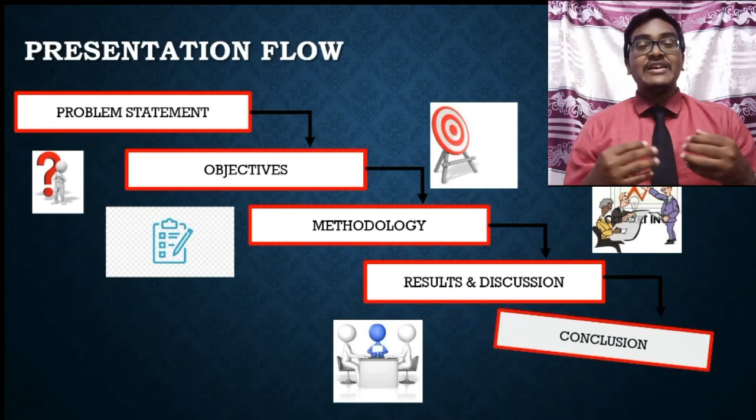Okay, the problem statement for my project. First, without adequate knowledge. People use these composite materials easily without adequate knowledge of disposal procedure. Second, end up throwing. After the end of life of the composite material, usually people may end up throwing it to the rivers, planted or sending waste to the landfill.

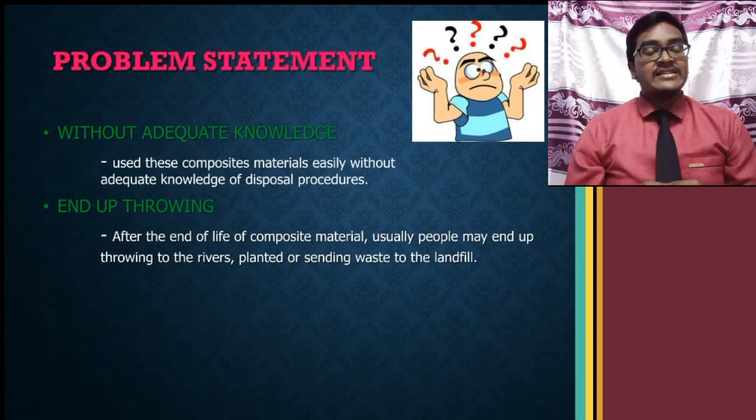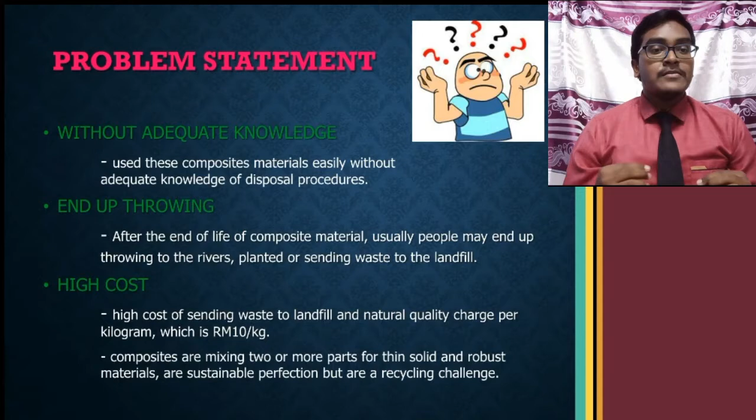Lastly, high cost. High cost of sending waste to landfill and natural quality charge per kilogram, which is 10 ringgit per kg. Composites are mixing two or more parts of thin solid and robust material, are sustainable perfection but a recycling challenge.

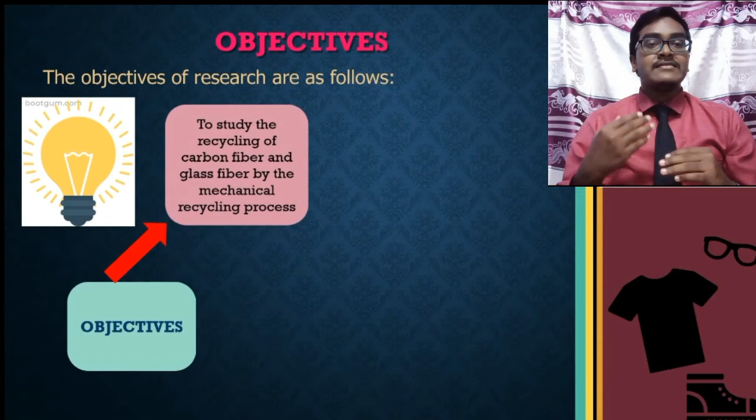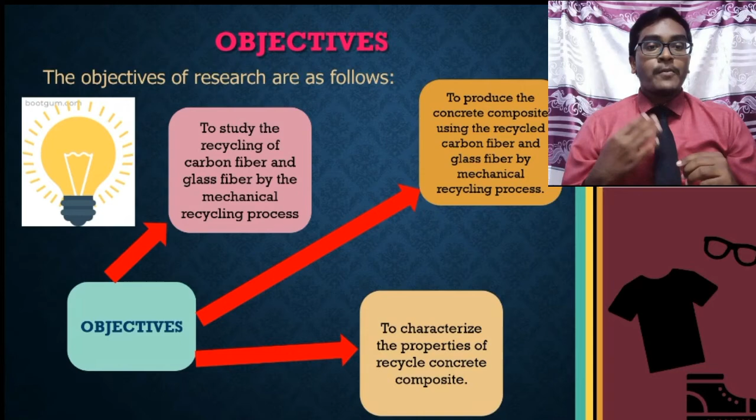Okay, now we move to objectives. There are three objectives for my research. First, to study the recycling of carbon fiber and glass fiber by the mechanical recycling process. Second, to produce the concrete composite using the recycled carbon fiber and glass fiber by mechanical recycling process. Lastly, to characterize the properties of recycled concrete composite.

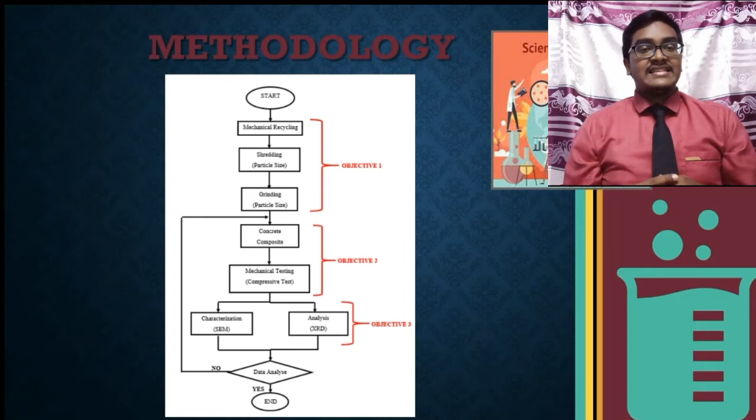Okay, here is my methodology. First, start, then mechanical recycling, then shredding, grinding, concrete composite, mechanical testing, which is compressive testing, then analysis of the recycled carbon fiber and glass fiber on concrete composite with SEM, which is scanning electron microscope, and XRD, X-ray diffraction, then lastly data analysis.

Okay, now I'm going to explain mechanical recycling. As you can see, there is the recycled glass fiber and recycled carbon fiber. So cut the recycled glass fiber and carbon fiber into small pieces. So the first step is shredding. Shredding the recycled glass fiber and recycled carbon fiber composite material into 50 to 100 mm small pieces using a shredding machine. Okay, next is the grinding process. Using the grinding machine, break down the material into 10 mm to 50 micrometer pieces.

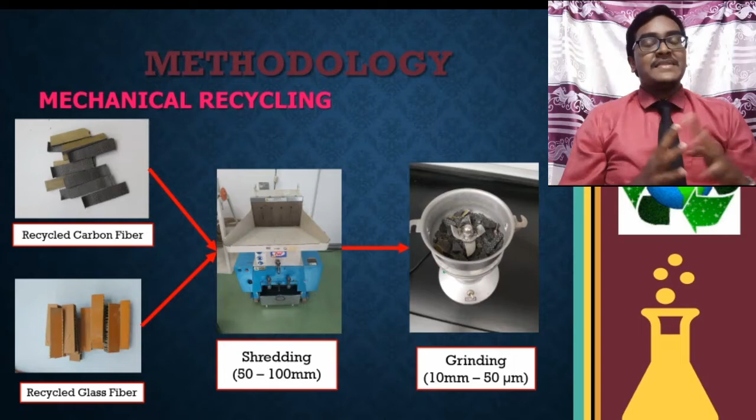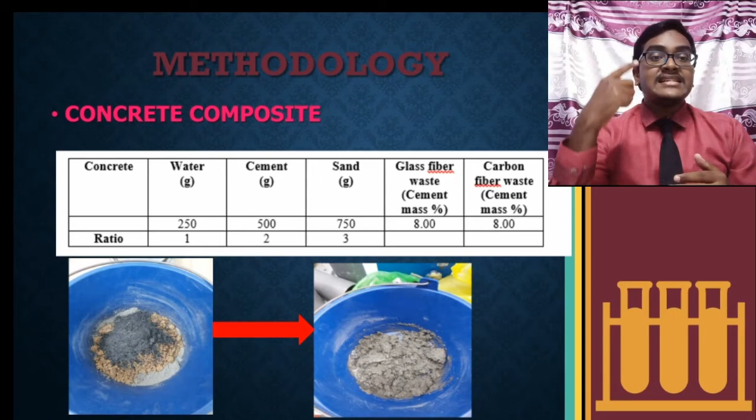Then pour the normal concrete into a cylinder-shaped mold measuring 100 mm in diameter and 150 mm in height to keep the concrete in place until it has set, and push it so that it fills the space. Pour the concrete with recycled glass fiber into a cylinder-shaped mold measuring 100 mm in diameter and 150 mm in height to keep the concrete in place until it has set, and push it so that it fills the space. Lastly, repeat the same steps for concrete with recycled carbon fiber.

Okay, before moving to the mechanical testing, the concrete must be cured. As soon as the concrete is hardened, curing should begin and last for at least 7 days. Okay, now mechanical testing for concrete composite. There was one mechanical test carried out in this research, which was compressive testing. The experiments undertaken in this analysis adhere to ASTM C39. As you can see, the figure shows the compressive testing machine with maximum load at 100 kN. Determine the fracture type and then enter the load and fracture type.

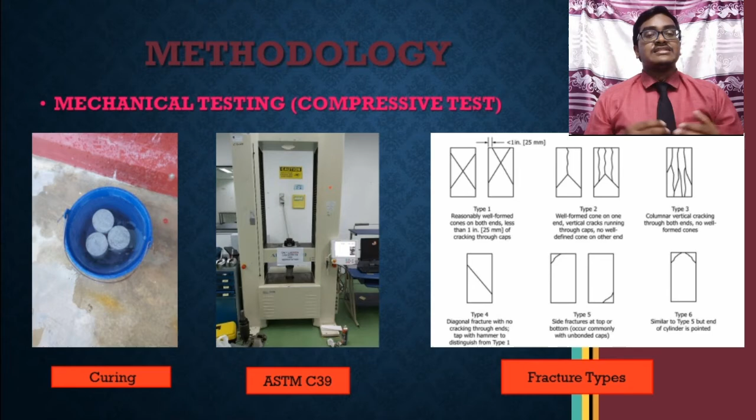Okay, now I'm going to explain results and discussion. First of all, visual observation. As shown in the figure, the recycled glass fiber and recycled carbon fiber are in microscale size after the grinding process. Besides, after the grinding process, the microscale recycled glass fiber and recycled carbon fiber are mixed together with water, cement and sand to make the concrete.

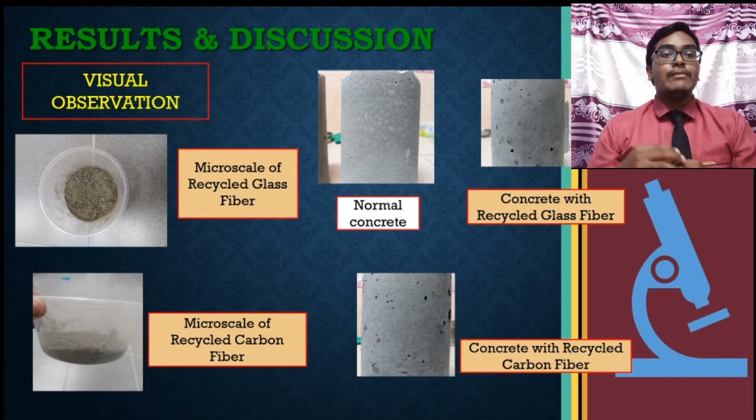Okay, as you can see in the figures, the normal concrete, concrete with recycled glass fiber and concrete with recycled carbon fiber successfully formed with good surfaces and in good condition. But the normal concrete had a good surface, while the concrete with recycled glass fiber and concrete with recycled carbon fiber had slightly poor surfaces. This is because the concrete was not pressed correctly in the mold to make the surfaces smooth.

Okay, now we move to analysis of the compressive properties. The figure shows the stress versus strain of normal concrete, concrete with recycled carbon fiber and concrete with recycled glass fiber. From the stress versus strain graph, the ultimate tensile strength and Young's modulus of each concrete were calculated. The ultimate tensile strength for normal concrete is about 8.20 megapascal, while the ultimate tensile strength for concrete with recycled carbon fiber is about 4.62 megapascal. Besides, the ultimate tensile strength for concrete with recycled glass fiber is about 9.06 megapascal.

The largest increase of ultimate tensile strength is about 10.49% at concrete with recycled glass fiber addition compared with normal concrete. It has been found that there is a greater adhesion between the concrete and the recycled glass fiber. In addition, the microscale size of recycled glass fiber had good bonding with concrete when a stress is being applied. Hence, the tensile modulus and strength are greatly improved due to this beneficial interaction.

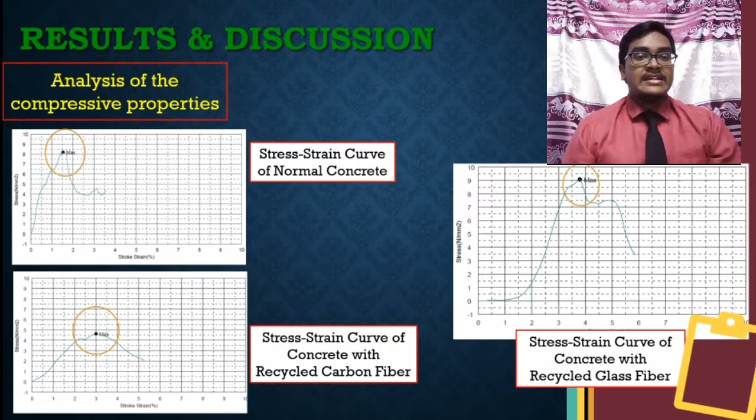After doing the compressive test, we analyzed and recorded the cylinder fracture type. The figure shows the normal concrete after the compressive test. Normal concrete shows type 2, which is a well-formed cone on one end, some vertical cracks running through the caps, and no well-defined cone on the other end. The fracture type for concrete with recycled glass fiber is type 1, with reasonably well-formed cones on both ends.

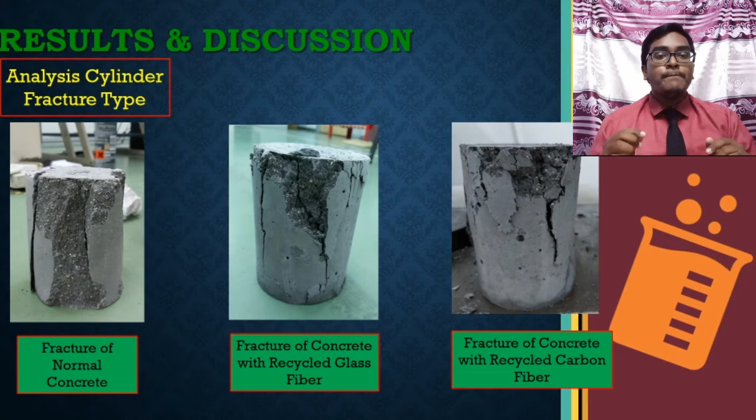In addition, as shown in the figures, concrete with recycled carbon fiber shows fracture type 5. This type defines a side fracture at the top, which occurs commonly with unbonded caps.

Okay, now we're going to the results and discussion for the analysis of SEM, scanning electron microscopy. The figure shows the micrograph of the normal concrete sample. From the micrograph, it was clearly shown that there were not any foreign objects present in the mixture. The weak interface resulted in lower strength of the concrete. Other than that, there is some poor bonding that becomes a weak point when stress is applied.

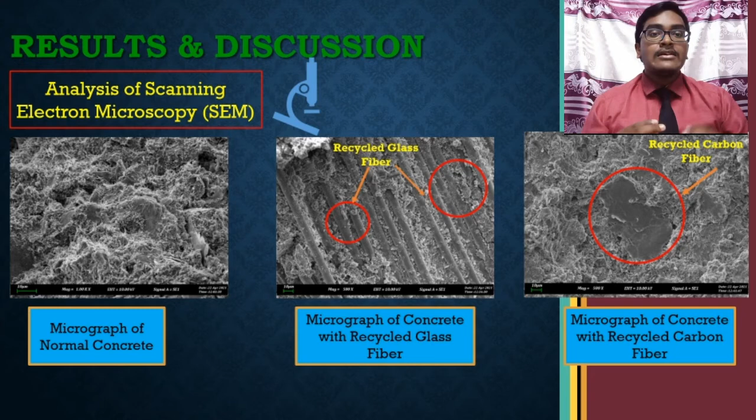Okay, the figure shows the concrete with recycled glass fiber. This proves that the interface between the sand in concrete and the recycled glass fiber is stronger, promoting better strength. Other than that, a good dispersion of recycled glass fiber in concrete was found, which tends to give high strength and good bonding. Lastly, the figure shows the concrete with recycled carbon fiber. It proves that the interface between the sand in concrete and the recycled carbon fiber is not strong enough.

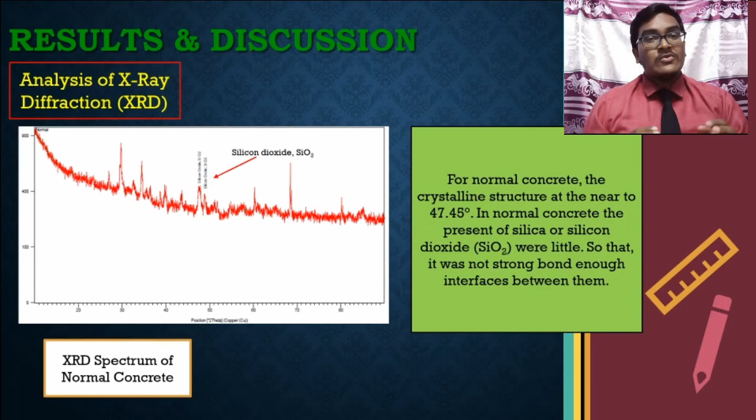Okay, now I'm going to explain the analysis of XRD, which is X-ray diffraction. As you can see, the figure shows the XRD spectrum of normal concrete. For normal concrete, the crystalline structure is near 47.45 degrees. In normal concrete, the silica or silicon dioxide present was little, so the interface between them was not bonded strongly enough.

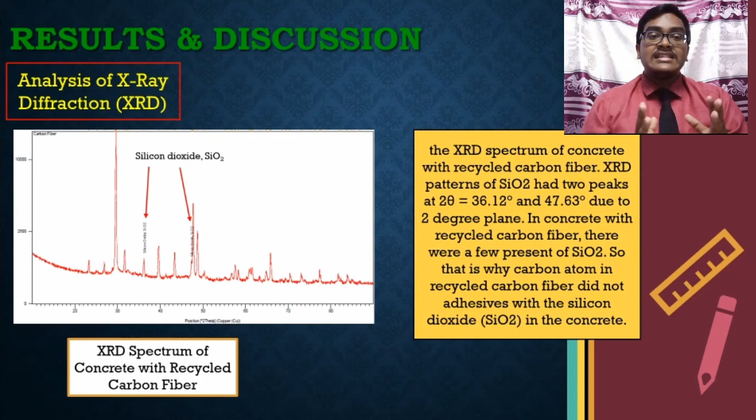Besides, the figure shows the XRD spectrum of concrete with recycled carbon fiber. XRD patterns of silicon dioxide had two peaks at 2θ equal to 36.12 degrees and 47.63 degrees. Okay, in concrete with recycled carbon fiber, there was little silicon dioxide present, which is why carbon atoms in recycled carbon fiber did not adhere with the silicon dioxide in the concrete.

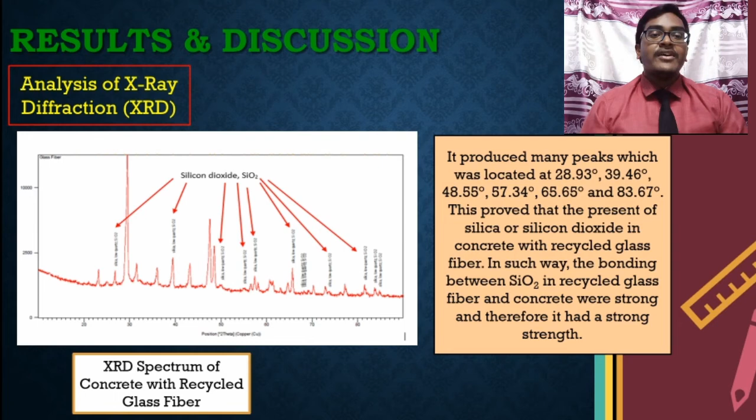In addition, the figure shows the XRD spectrum for concrete with recycled glass fiber. It produced many peaks. This proves the presence of silica or silicon dioxide in concrete with recycled glass fiber. In such a way, the bonding between silicon dioxide in recycled glass fiber and concrete was strong, and therefore it has strong strength.

Okay, now we're moving to the conclusion. The first objective of this research, to study the recycling of carbon fiber and glass fiber by the mechanical recycling process, is successfully achieved. The second objective, to produce the concrete composite using the recycled carbon fiber and glass fiber by mechanical recycling process, is successfully achieved.

Okay, lastly, the bonding surface morphology and the crystallographic structure of normal concrete, concrete with recycled glass fiber, and concrete with recycled carbon fiber were observed through scanning electron microscopy and X-ray diffraction respectively to meet the last objective.

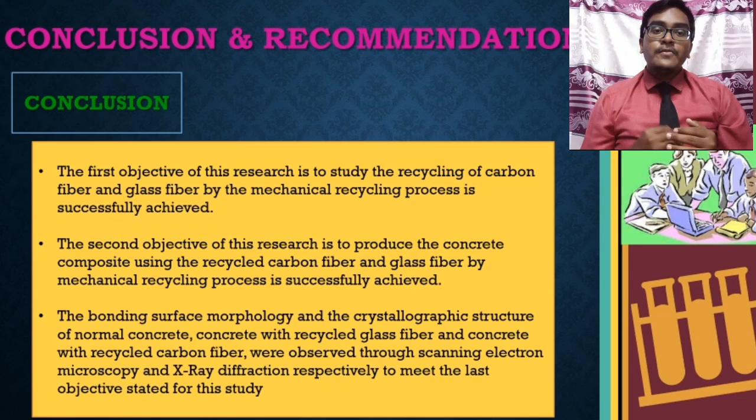Lastly, we're going to see the recommendations. In the future, use recycled glass and carbon fiber from a chemical process for the concrete composite. Second, to ensure that this composite is appropriate for the building sector, it must be studied further to test certain durability qualities, including permeability of water and permeability of gas.